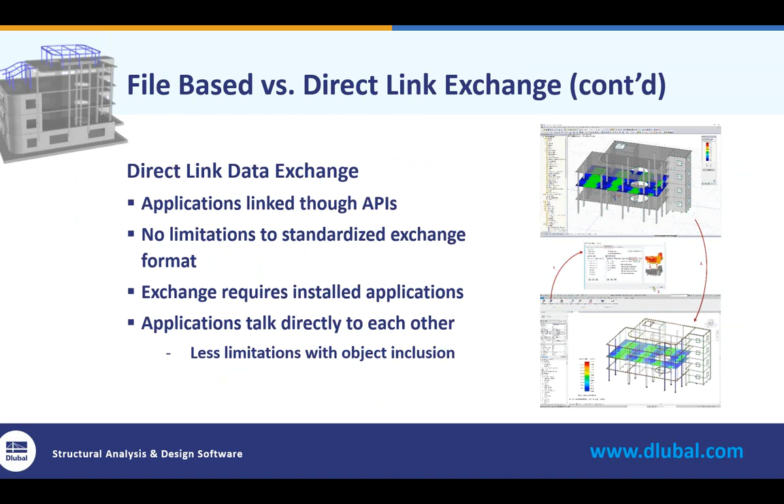With this option, the applications talk directly to each other. So with this, we're going to see a lot less limitations with object inclusion. So back to my previous example with nonlinear supports and load combinations, well, now we can just code in the option through the API interface to keep this information available. So whether we're round tripping between the programs, we'll never lose that information, even if it isn't necessarily included in the program that we're interfacing with.

So this leads us to the Dlubal Revit link and the import-export options available. So I want to first note that this does utilize direct integration with API. So again, we're going to see a lot less data loss than when we're creating a data file format. This option is included in RFEM.

So for those of you who are not familiar with our programs and how they work, we do operate with the add-on module system. So RFEM is our main program. This provides us with a full analysis. Our add-on modules are utilized for design, for example, or dynamics. Well, the import-export options with the Revit link are all included in the main program, and this is at no additional cost. The ability to integrate between the two programs is bidirectional. So we can update all or only part of the structure and continue to cycle between both programs continuously.

You can transfer the structure objects. So we can see here from our dialog box to import export in Revit directly the ability to turn on or off these objects. We also have the ability for the transfer of loads and load combinations. So in our next tab, the structural settings, again, you see the ability to turn on and off those load cases, load combinations, result combination options.

And lastly, with regards to result sharing, we have the ability to export the RFEM results to Revit. This includes both members and surfaces. So we're going to see the information available for deformations, internal forces for those members and those surfaces, and reinforcement, for example. Now, we've had the ability to transfer reinforcement of surfaces, so whether that's walls, elevated slabs, slab-on-grades for concrete design from RFEM to Revit for quite some time, but we also recently added reinforcement for members.

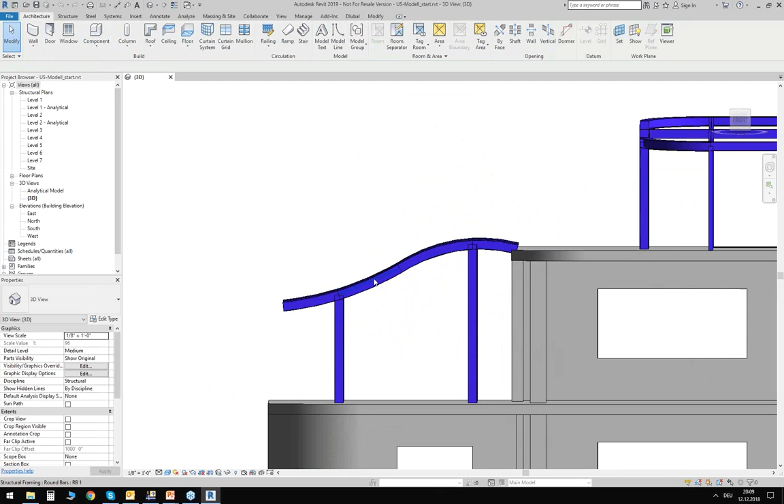Regarding the structure itself, I have here a mixed structure made of concrete and steel. I have a foundation slab. I have some walls with openings. I have curved walls, as you can see here in the corner. I have slabs with openings, concrete columns, and 2 steel constructions on top. The one on the left side has a curved roof shape, and the one on top has a sloped roof shape.

What you cannot see here right now in this Revit model, or what I did not include, is basically everything apart from the static relevant objects. So things for heating, cooling, ventilation, electrical systems, any kind of building services. You can have all those things inside the Revit model, of course. They're just not important when it's about showing the interface to RFEM. Important for the interface is the analytical model in Revit, and how you can get this analytical model I will show you now.

I think it's fair to say that what we have here is the physical model. It's the solid representation of the structural elements. So everything here is basically a solid: the foundation slab, the column is a solid, the slabs are solids.

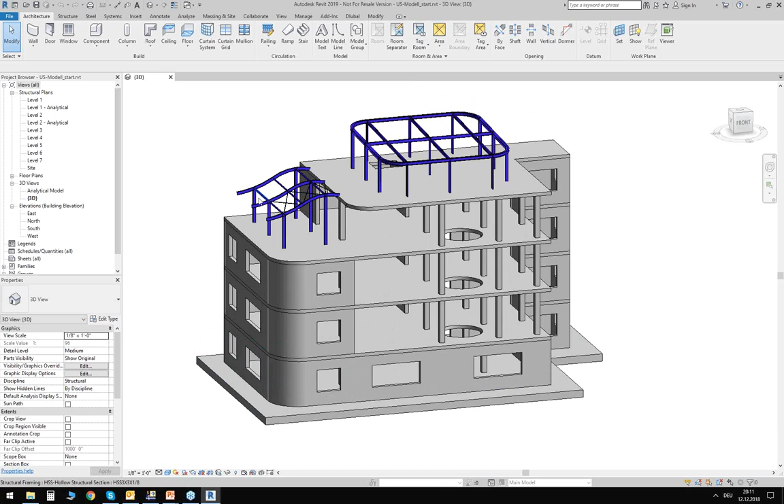But when it comes to the analytical model, we usually try to simplify things. So for example, the foundation slab we would usually simplify into a 2D surface, or the beams we usually consider as a 1D element. And this simplification can be done in Revit directly.

If you click on the structural element, you can access the properties here on the left side, and you can enable the analytical model. It has already been done here by me in advance. And if you do so, you will get an additional tab for the analytical foundation. Here you can now edit the properties of this analytical foundation.

So you can, for example, assign a surface support below, or you can deal with the analytical alignment of this 2D surface. Similar options you also have for walls and other structural elements, for example also for beams. Depending on the analytical object you select here, you may have different settings you have to deal with, or you can deal with.

So for example, we have here as well the analytical alignment of the member axis, but we also have an option to define member end releases in Revit. Additional to this, and this is now a little bit Dlubal specific, there are Dlubal parameters that I activated in advance. I have here an option to define this analytical member in the background as a member type truss. Or for my bracing here, I can define it as a member type tension. This is information which we can exchange with RFEM or with RSTAB, and I will explain it afterwards again.

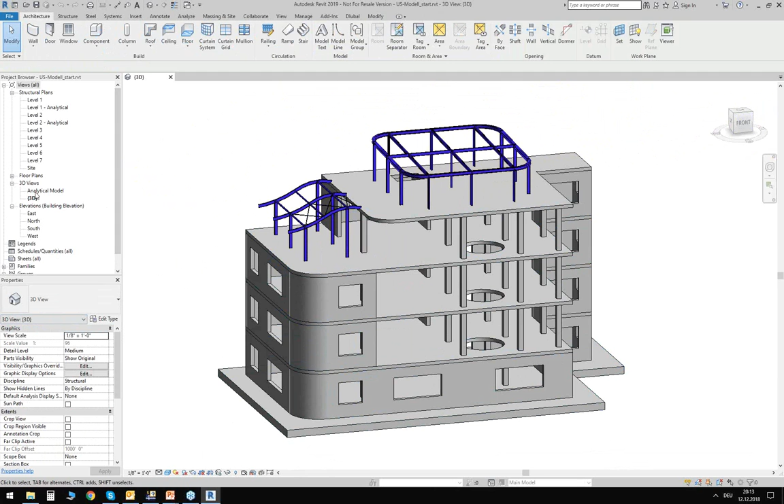Okay, so by activating the analytical model for each of those elements, you can create the global analytical model. And this you can, of course, also see in Revit. Revit has a predefined 3D view, which we can activate. So again, this is the analytical model. This is what we will export afterwards to RFEM. And you can see what I just mentioned: the foundation slab is now a 2D surface. Also, the members in general are now just a 1D element.

So in general, I think it's clear that when we export the analytical model, the geometry is quite clear. It's fixed, clearly defined by the length and the height of the elements. What's maybe not so clear is the exchange of information. And with information, I mean the exchange, for example, of the material names, of the cross-section names, and so on. I think in general, you can imagine that the material names in Revit may be different to the name of the material in RFEM. So how you write the name can be different.

Maybe I can show you one example here. I go to the Manage tab into my material library in Revit. And here you will find a material which is named Concrete Normal Weight 4 KSI. This is the material that I used for my concrete elements in the background. If we would export that name to RFEM, RFEM probably couldn't handle it. It doesn't know what kind of material that is, because the name of the equivalent material in RFEM is different. So we somehow have to link this information between those two programs. We have to define something like a conversion table.

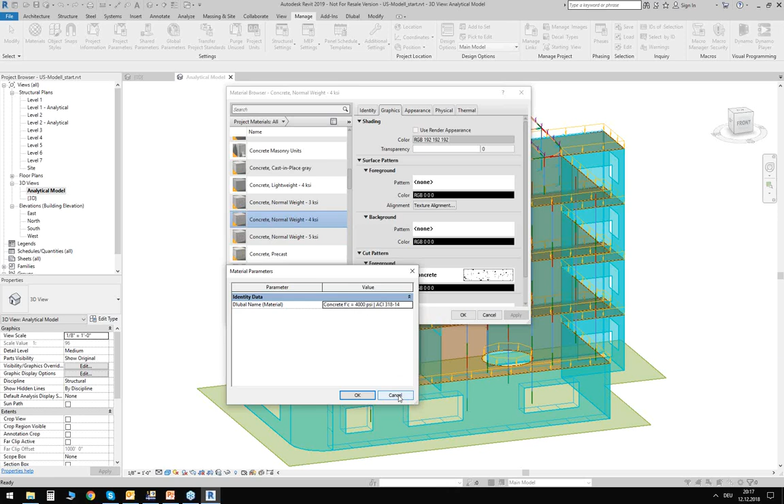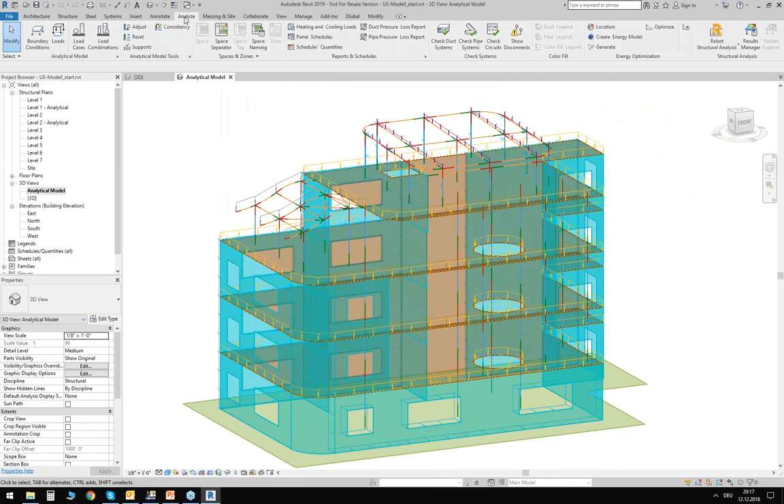Okay. Apart from that, we can also see some loads inside this analytical model. So we see here that there are some loads assigned to my members. Revit gives me the possibility to define load cases, load combinations, and even loads. You can access this information via the Analyze tab, and you can click here on the load cases, and you can see we have here 4 load cases for the dead loads, live loads, wind loads, and snow loads.

And all this information I can now export to RFEM. And I think this is something we could do right now. So how can I do it? First of all, I will show you my empty RFEM. There's nothing inside. And I can start the export from Revit. So I have here a Dlubal tab. And I have here options to export and import between RFEM, export and import to RSTAB.

And here I have some additional buttons. Here, for example, the one which we call Dlubal parameters. This is what I just explained. We have parameters for the materials, for the cross sections, for these special member types. Here you can activate these parameters in Revit, so you can access them here in these windows.

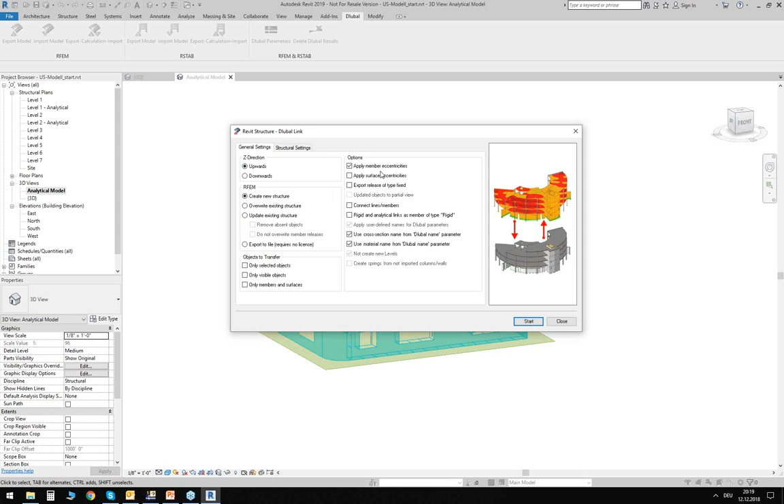So I want to export my model to RFEM. Therefore, I export this model. I can define some detailed settings for the export. I can define the Z direction of my RFEM model. It should go upwards. I want to create a new structure in RFEM. I want to apply some eccentricities that I have here inside my Revit model. And I also want to use these cross-section and material parameters that I just defined. Additional to that, I can also export my loads.

I can run the export. And you will see that it's quite quick. Yeah, the export is already done. So I can close this window. I can open RFEM again. And you can see directly that the structure we receive here on this end looks quite similar to the one in Revit.

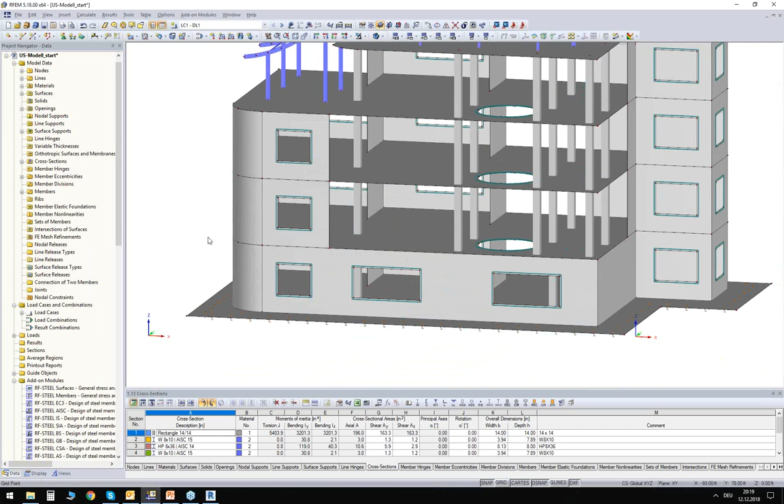We have the foundation slab as a 2D surface, of course, including some supports. We have our walls with the openings. We have this curved wall here in the corner. We have concrete columns. We have steel constructions here on top, the one on the left with the curved roof shape, the one on the top with the sloped roof shape. Yeah, looks quite good in general.

But if you exchange data, you always want to make sure that you exchanged the data correctly. So we should have a detailed look at this data. There are different ways how to do it, and the one way I would like to show you is by using the display navigator here on the left side. And here I have an option to render my objects according to different colors. So for example, I can render my structure according to my materials. We haven't seen any difference now because it's basically the default rendering option.

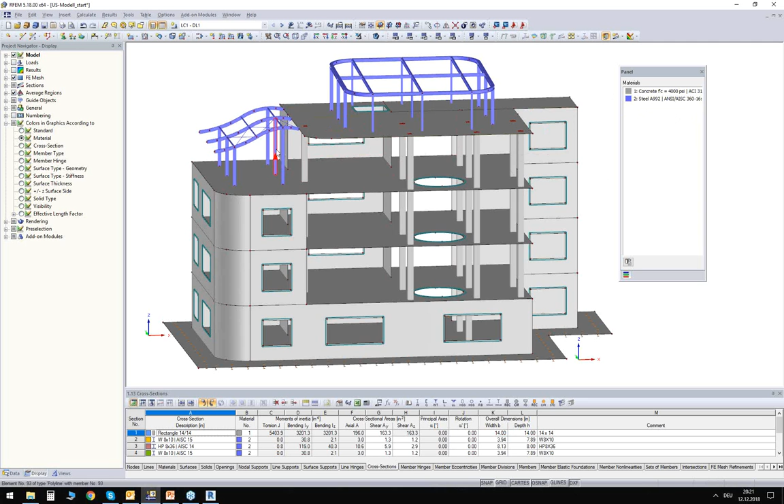What we can see here is that every gray element is made of concrete and every blue element is made of steel. We will see an effect if I change it to rendering according to cross sections. Yeah, thank you. We see here that the cross sections are now colored, and the color represents a specific cross section. So this allows us to get a nice overview of the structure and the exported sections from Revit.

We have further options here, for example, the member type. This is something I wanted to explain again. You can see here that we have different member types. We have member type beam, truss, and tension. And this is what I defined in Revit before. We said the coupling member should be a truss member. And we also said that this bracing should be a tension member.

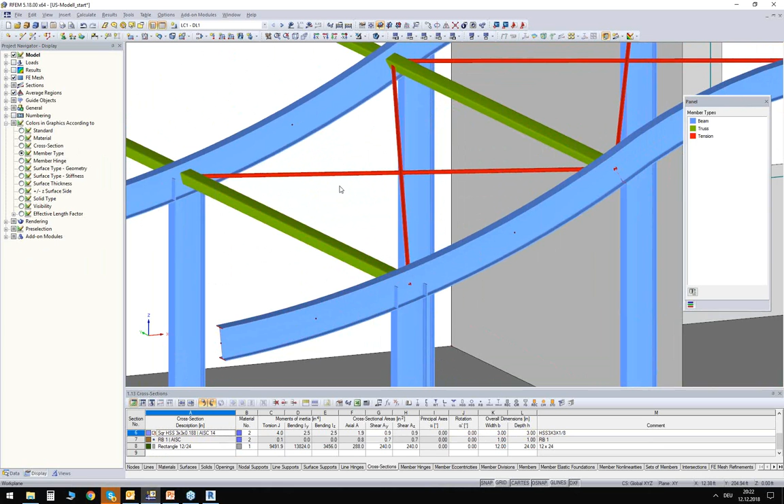And this is advanced information for RFEM. This basically means a truss member is a member with hinges at the beginning and the end, and a tension member is a truss member plus a nonlinearity assigned so that it fails under compression. So this is additional or advanced information that you can exchange between Revit and RFEM or Dlubal in general.

Okay, there are further options, for example, the rendering according to surface thicknesses and so on. And there's one which I also want to show you. It's according to member hinges. What you can see here is now that there's no color included in this graphic. That tells me that there is no hinge included. So I have no member hinges here in this structure.

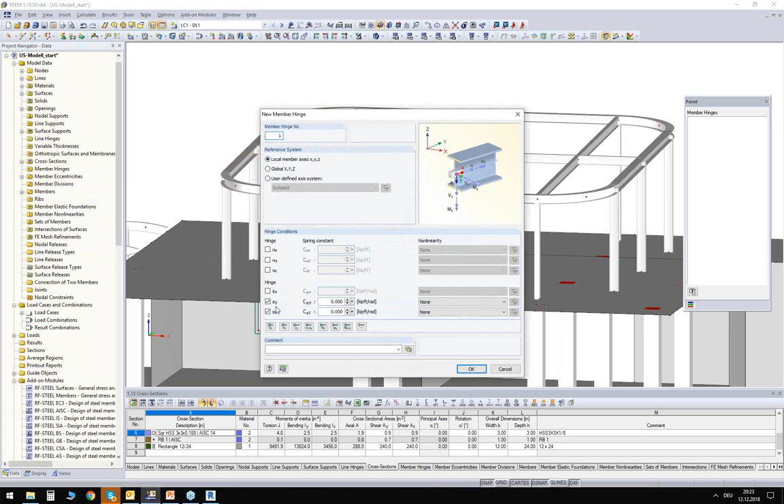What that means is that every connection here in the steel construction is a rigid connection. And as a structural engineer, this is something you want to avoid. And of course, we can add these member hinges here in RFEM as well. So what I'm going to do is the following. I will define one type of member hinge. In that type, I want to release the rotations around the Y and the Z axis.

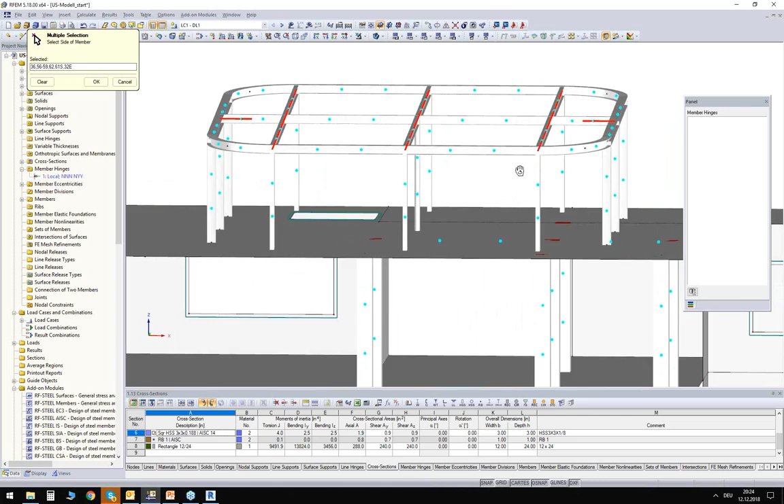And now I can assign this member hinge graphically to my RFEM model. Assign graphically to members. The only thing I have to do here right now is selecting these members. Depending if I select the end or the start or the center of the beam, I will apply this member hinge to the end, start, or on both sides. Okay, let me just double check if I did it correctly. Yeah.

I could even double check it by this graphic, which we have still activated. You can see now, I have one member hinge here, and the blue color will show me on which side of the beam I defined it. Okay. So with the display navigator, we can double check, for example, the imported data. We assume the model data is now correct. So I want to continue with my loads.

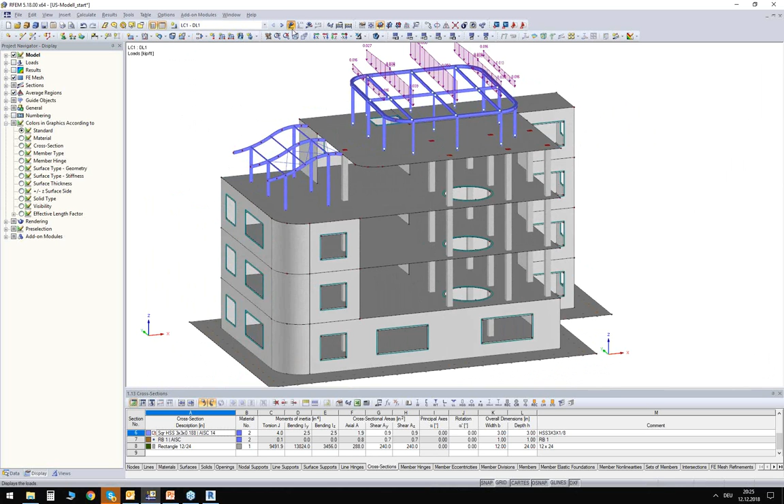I have here 4 load cases. These are the 4 load cases I expected to have because I exported them from Revit. And I can also take a detailed look. I have some dead loads, additional dead loads. In this load case, I have some live loads here on top of the slabs. I have some wind loads and also some snow loads.

I can see directly that the person who created the loads in Revit forgot the snow loads, for example, here on this steel construction. Again, this is something I can, of course, also add in RFEM. Therefore, I'm going to use a small generator. I will generate some loads from area loads on members via plane. So I'm defining the magnitude of these loads, 0.02 KSF. They should be related to the global projected area.

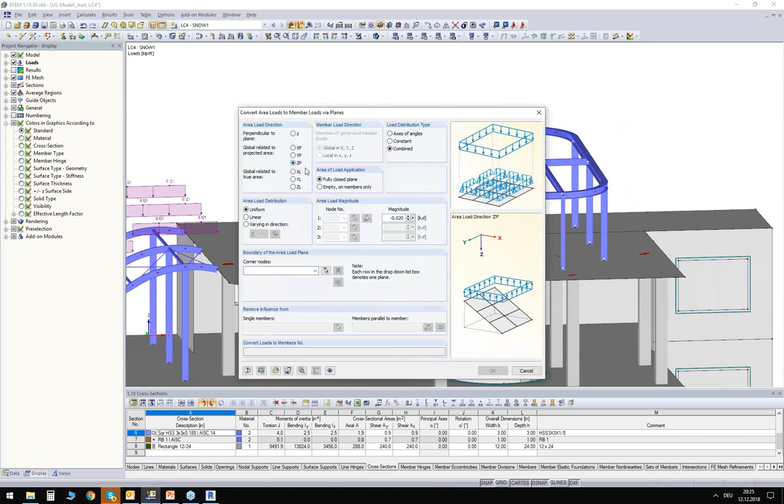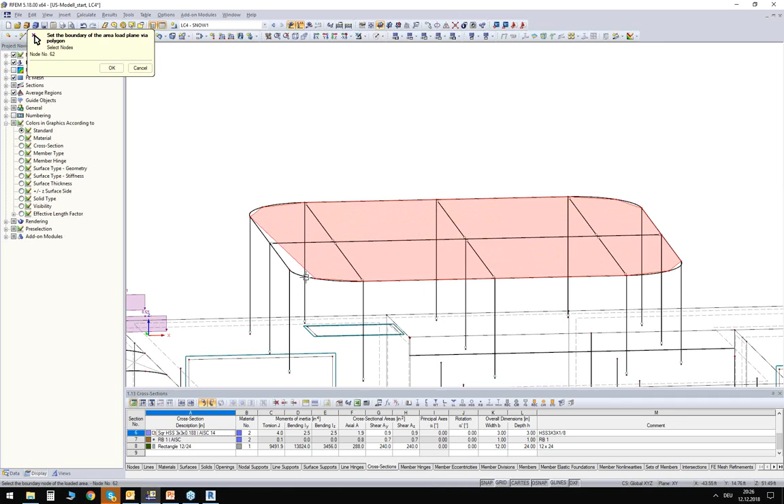And I can pick the corner nodes of my area where they should act. I will simplify it a little bit here for the presentation, just so we save a little bit of time. So I'm picking these corner nodes and I'm cutting a few edges, I know, but yeah, should be okay for now. I want to remove the influence from all horizontal members because I want the load to be applied only on the slope beams. Okay, so this is what I receive.

After I did that, I can see my area load. I can also change the display and display it separately as member loads. The intelligence of that generated load is still active, as you can see. So it's still a generated load. And this is an advantage for something I will show you afterwards. Okay. I don't want to deal with the loads any longer. For now, it should be okay.

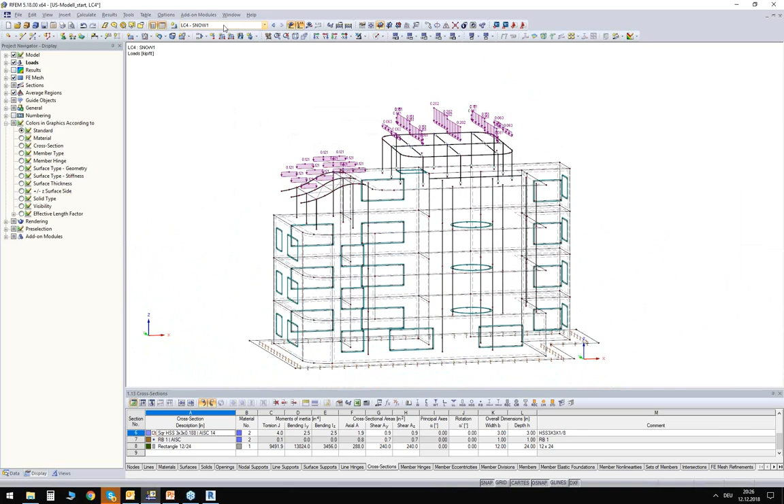So the next step would be the combination of these load cases. This is something I can do in RFEM as well. I go to my general data. I will enable the automatic combination of load cases according to the ASCE code, and create load combinations automatically. I want to control this automatic load combination a little bit. Therefore, I'm checking the related tables.

First of all, I want to make sure that the correct action category is used for every load case, which is the case here. In case we would have multiple load cases in the same action type, so in case we would have multiple wind load cases, for example, I could control here in that area that they should act simultaneously or alternatively or in groups or whatever.

Another important piece of information which we have to give to this automatic combination is according to which design situation it should create these combinations. So there is the LRFD section, the ASD section, extraordinary, structural integrity, and so on. And every design situation has its own rules for how you have to combine load cases, which you can see here. These are the rules according to the LRFD. These are the rules according to the ASD. You have different factors here and a different setup in general.

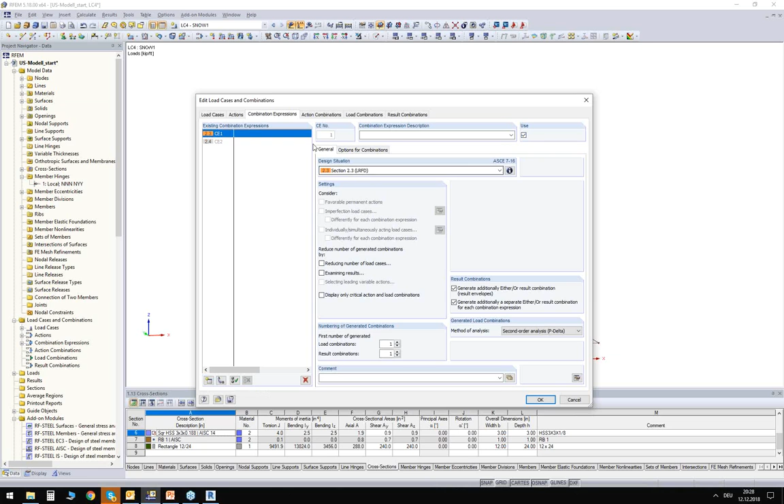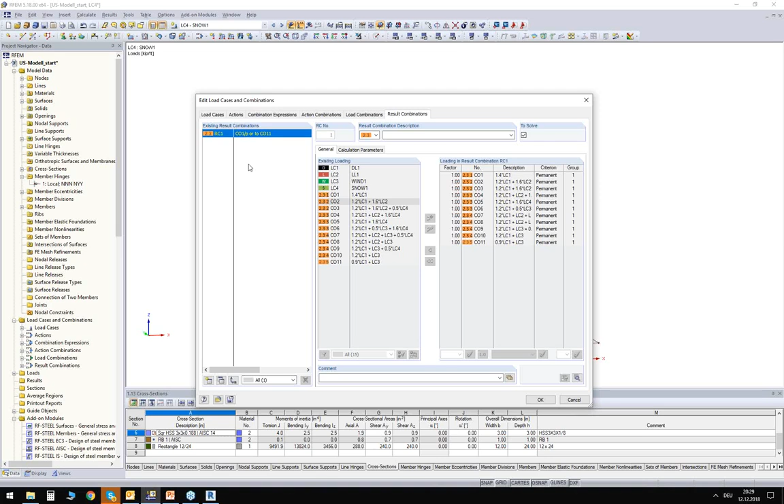I will create these combinations here. I can have a look at them again. I can see the factors, so I can control it or double check it. Additional to this, I get a result combination. A result combination is like an envelope for all load combinations. If you take a look at the results of a result combination, it will show you the maximum and the minimum and its related internal forces. Okay. You can switch between the load combinations via this drop-down menu.

So before we run the calculation, we should have at least a rough look at the finite element mesh. It's a finite element analysis here, so the finite element mesh has a huge effect. So what I will do is I go to my FE mesh settings and I will only define the target length of my finite elements. This is the most important information for now. I will regenerate the mesh and I can see the finite element mesh now.

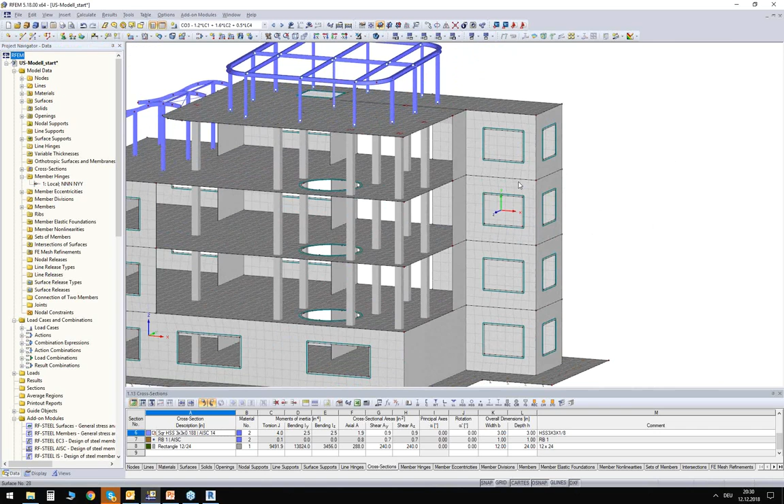In general, you could say it looks quite good. I mean, it's decent. There are some areas where it's maybe not so optimal. For example, here on the right side, where I have these openings, the windows inside, I have just two elements between the edge and the opening. This is not enough elements. So I want to optimize that area, let's say just this area here. How can I do this?

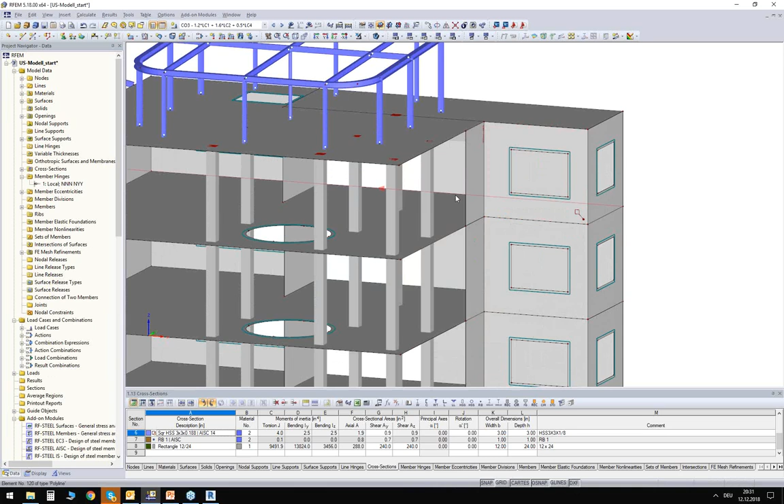I just double click on the surface. I can go to my FE mesh tab and activate a FE mesh refinement. The only info I have to give here is the target length of my finite elements in that area, maybe 0.5 foot. I accept and optimize that also on lines or on nodes. I will do it also for the node here. So around this node, I want to have an FE mesh refinement. I go to the tab, I activate the FE mesh refinement, and I can define additional information about the radius and the target length inside.

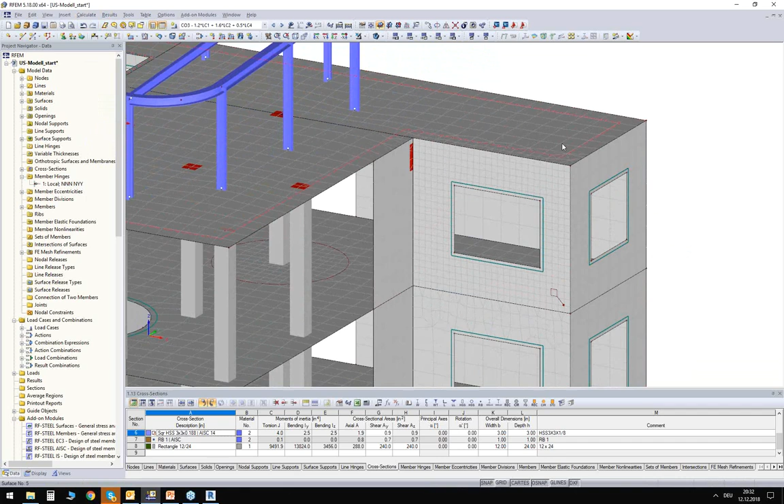Okay, we assume we optimized the FE mesh of the structure for every section. I will skip it here right now, and we regenerate the FE mesh. You can clearly see the effect now. So this is the global FE mesh. This is the refined FE mesh. You can see the effect as well here around the column. It was quite easy to change that.

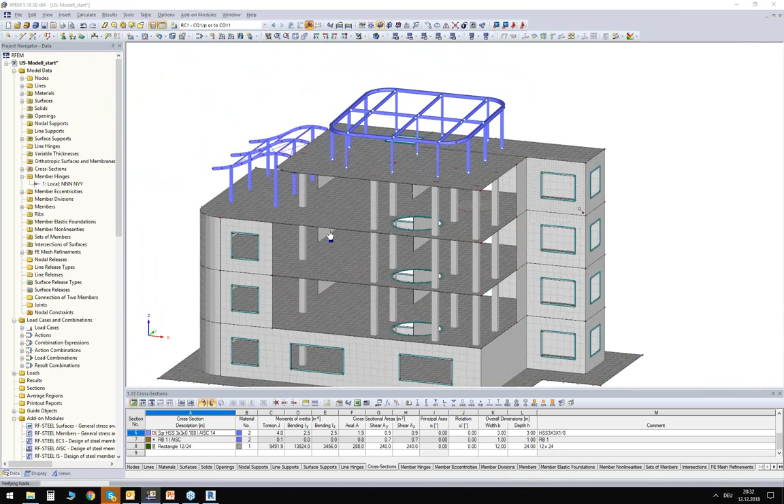Okay. So the next step is basically the calculation of the internal forces. I will do it by selecting my result combination here, and I will say, please show me the results of this result combination. I could have also done it in a different way. I could have clicked on the button calculate everything. But what does it mean? It will calculate also the results of my load cases. But I'm not really interested in the display of internal forces of my wind load case where there is no self-weight acting. So to save a little bit of time, I just clicked on the results of this result combination, and the program is intelligent enough to calculate only the required load combinations.

Okay, we will see the results in a few seconds. And then we can continue with the design of the structure. Okay. For some reason, it takes a little bit longer than when I prepared it, but that's okay. Okay, the calculation finished, we will see the results in a second.

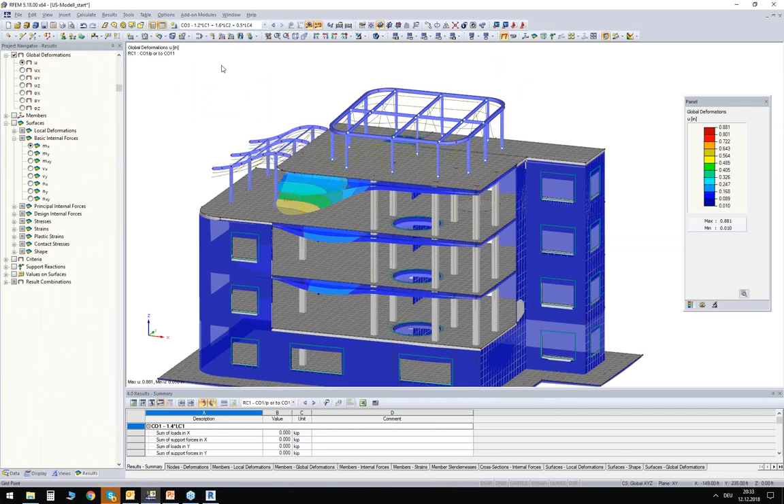And I can switch now again between my combinations and display for each combination my result. Let me decrease a little bit the display factor, otherwise it looks like the structure is failing. On the left side, I have my result navigator now. I can switch between deformations or member internal forces. So for example, you can see really nicely that the axial force in the columns will be increased every time it intersects with a slab, of course.

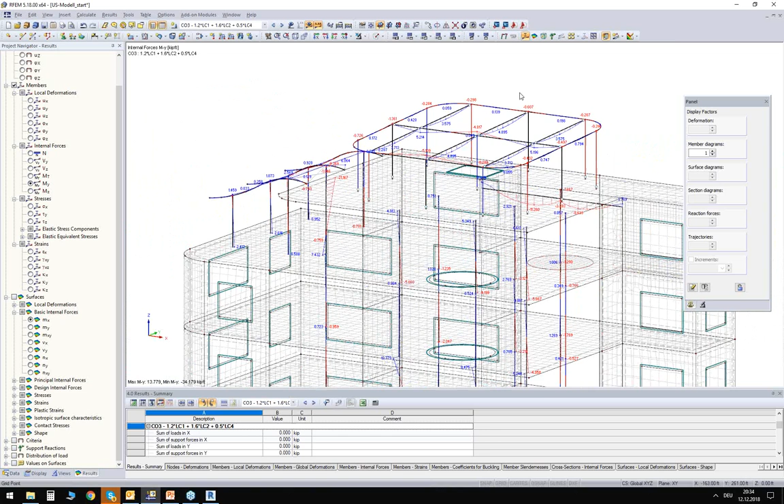I can also display some bending moments, maybe to double check if the hinges I defined work correctly. I can, of course, also take a look at the results in my surfaces, maybe some bending moments in my surfaces, or even the contact stresses on the foundation plate on the bottom.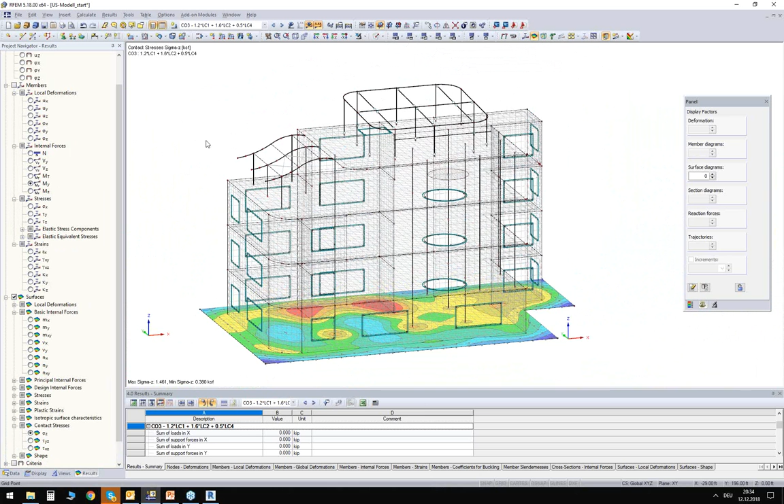With the calculation of these internal forces, we are not done; we have to design the structure. That means we have to do additional checks, stability checks, stress checks, and so on. And these additional checks can be done in additional modules or other modules.

And I want to go over this topic rather quickly because Amy has some really nice webinars where she explains every module in detail, or the most common modules in detail. So one module which I want to show is the module RF Steel AISC. It's for the design of steel members, and this is what I'm going to call up now.

You will notice that every module looks more or less familiar. So if you can handle one module, you most likely can also handle the other modules in general. So what I have to do is I have to select the members that I want to design. I only want to design here this beam and this column, for example. You can pick the code you want to design according to, and also the result combination.

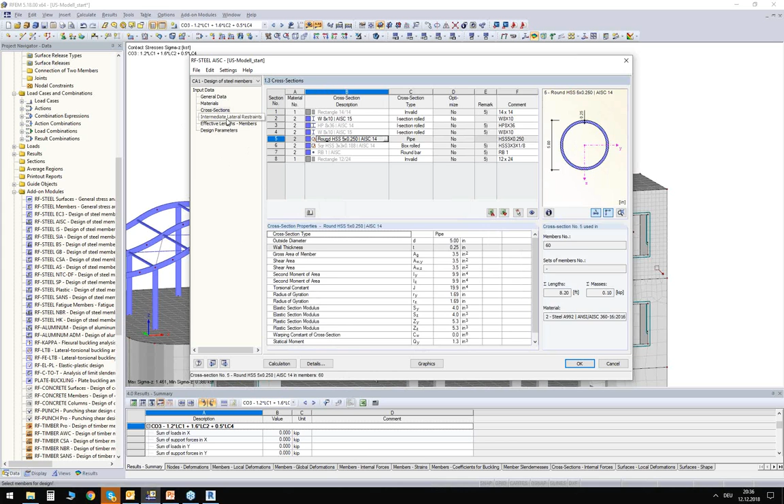You have now additional windows that you can go through. Some of them are just to give you an overview about certain properties for materials or cross sections. Other windows deal with the stability checks of the beams. So for example, you can define intermediate lateral restraints, you can define the buckling lengths, and so on, or the design parameters. I will leave those values on default.

So I will run the calculation and I switch into my result table design by cross section. So what I see here is for each cross section that I designed, the maximum checks. And I notice directly that the W section for the beam has a design ratio about 1.12. So it's higher than 1, which is not good. On the other hand, the design ratio of my column is not even at 10%. So I have to optimize both cross sections somehow.

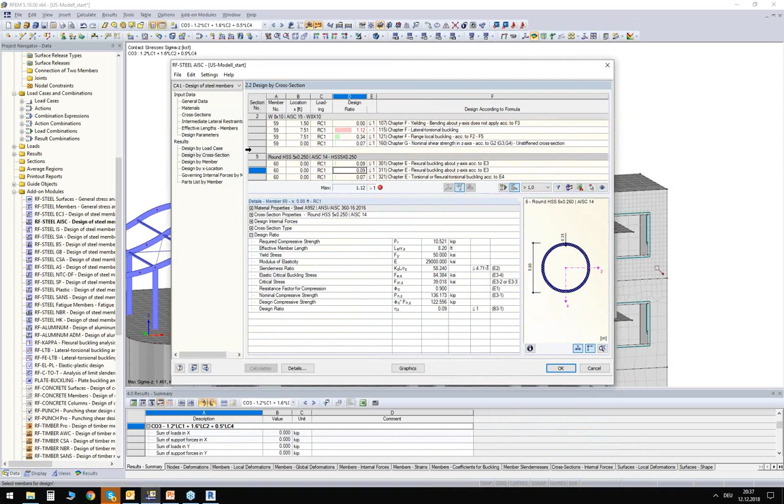And I can do it the following way. I can go to my cross section window again, and I could, for example, let the module optimize the pipe section automatically from the current row. Current row basically means the following. It will look for the best section in this list here. And with the best section, I mean the section where the design ratio is smaller than 1. And the criteria for this optimization is actually the self-weight of this section.

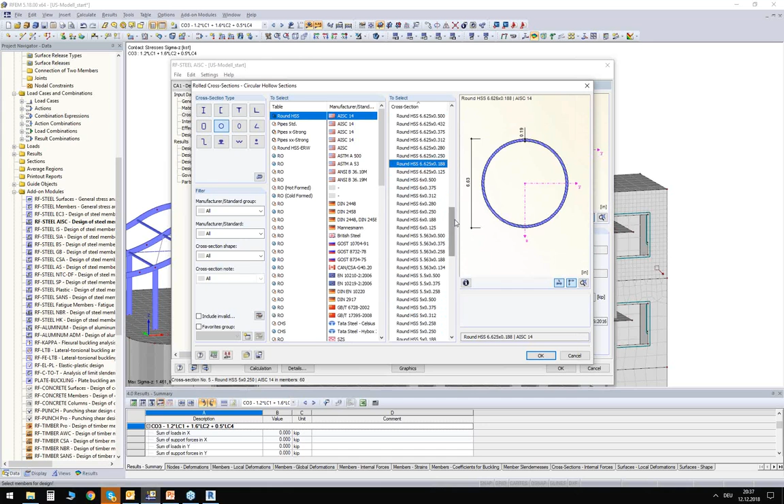Okay, wait, I did a small mistake, sorry. Import cross-section from RFEM. I changed it, which I didn't want to. I want to optimize the cross-section, and I could, in general, do the same for the W section, but due to constructive reasons, I'm not able to change the section.

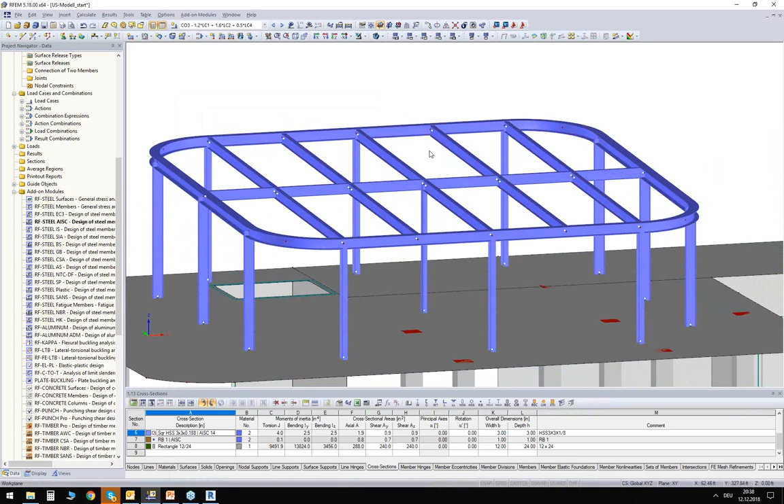So what I'm going to do here is I'm going to apply additional beams in my roof. So I just select the beams, and I use drag and drop to copy them. It's like a graphical tool to copy beams, and it's really quick and easy. And by defining additional beams, I will spread the load. And this is something that I want to show.

If you remember, we defined here this generated load where we defined the area where it should act on and so on. And this load is so intelligent that it recognizes these new members, and it will redistribute the area load to all beams now, to all slope beams. And this basically means that the load on the beam we design will be reduced.

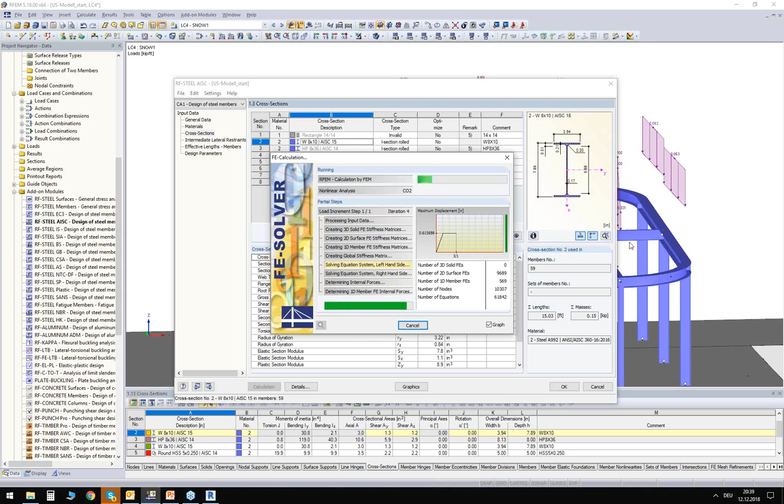So I go back to my module, and I rerun now the design. So for the pipe section, I'm using an automatic optimization, and for this section, I optimize the analytical structure in the background. I click on calculate again. And yeah, of course, I have to recalculate now the internal forces simply because I changed the analytical model in the background. I added additional beams, I redistributed my loads, so I have to rerun the analysis.

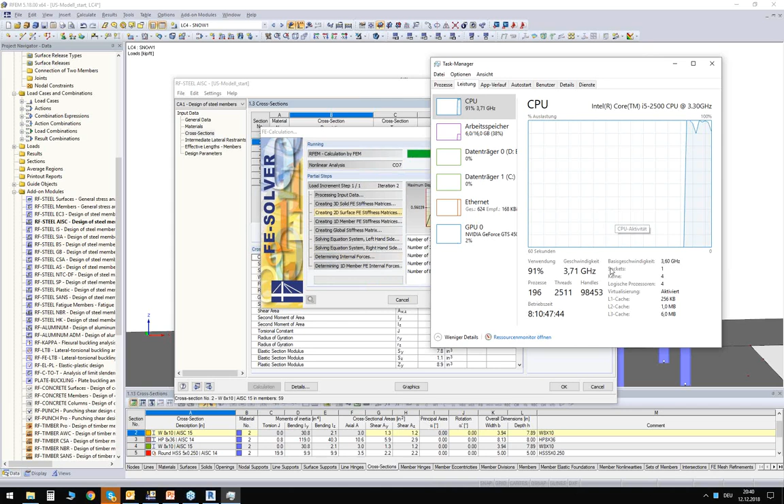Maybe one side information while we are recalculating this. Maybe something I can show you, the task manager. And in the task manager, you can see that I'm using more or less 100% of my CPU. That means we are able to use all the physical cores from the processor or from the CPU. So in case you have good hardware, it will definitely benefit the performance during the design or during the calculation here. Okay, yeah, we have to wait a few seconds more and then I'm done with the design.

Okay, this should be the last one. We will see our result tables again. And in these result tables, we will see now that the design ratio of the W section is at 66%, which is fine. And the design ratio of my pipe section is at 94%, which is also fine.

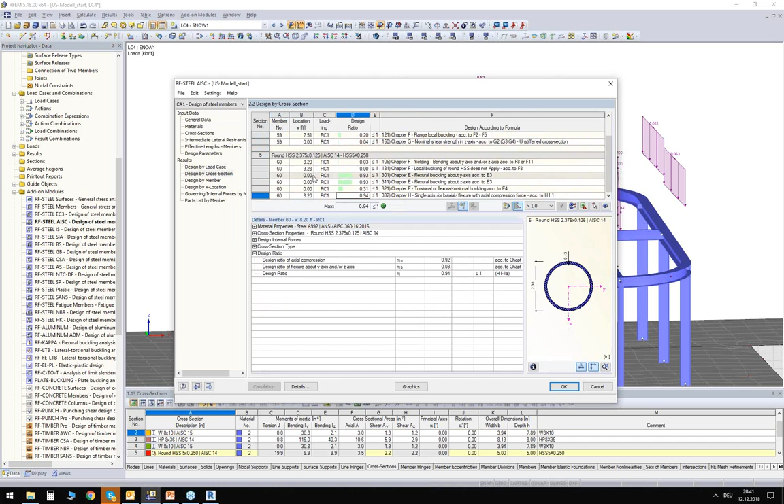So to make it 100% perfect, we would actually have to redesign everything because the design of this optimized pipe section has been done with the internal forces of my original structure. So what I would have to do is export this optimized cross section back to RFEM, recalculate my internal forces, and with these probably slightly different internal forces, I can rerun the design. I will skip this check right now, or this loop.

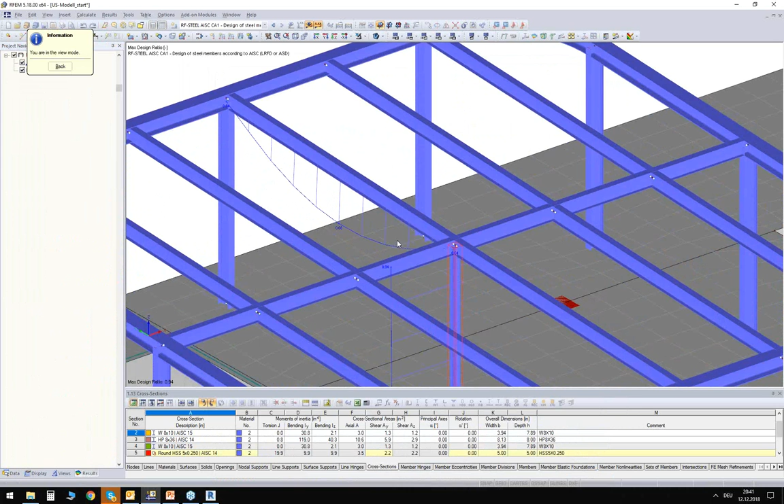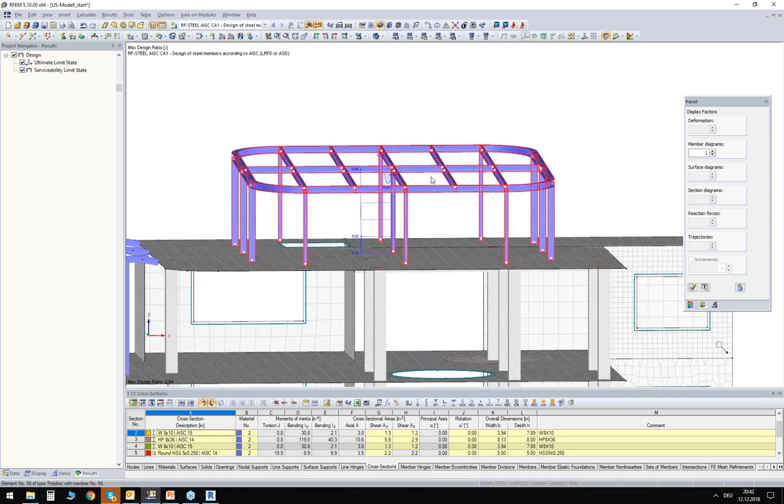Of course, we are able to display the design ratios also graphically. I think this is no big question. Okay, so we just changed a lot of stuff in that top steel construction here. We added hinges, we changed the amount of beams, and this is maybe something which you would like to give back to the Revit model. So you want to update the Revit model with this information. And the way you can do it is following.

You go back to Revit and you run the import from RFEM. You update the existing structure. I don't want to consider any eccentricities right now. I want to apply loads, that is okay. And I don't want to import any results right now. Just update the physical model. So I can start the import and you can have a look at this area here.

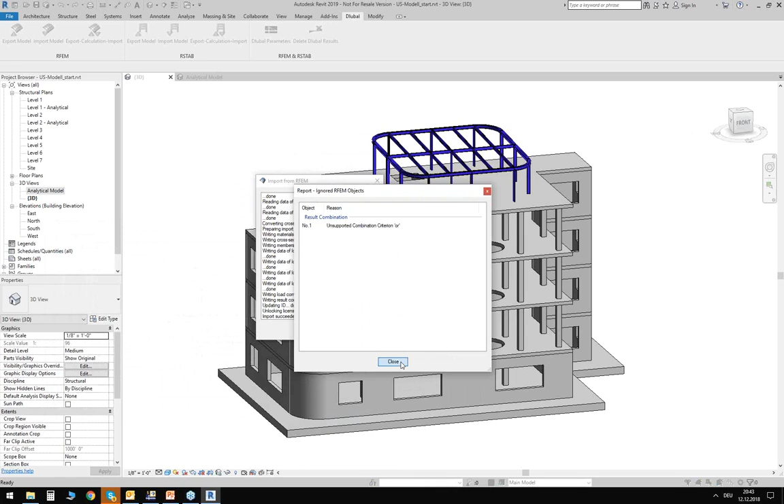Okay, so first of all, we get a message about an unsupported combination criterion. Basically, Revit tells me here that it cannot handle result combinations. It's not a big deal here. Important is that we have now these additional beams in the roof. And we also have updated information in the analytical model.

So you can see here in the properties that we have now also information about the hinges on the bottom of this column and also in the beams and everything. So we were able to update the analytical model in Revit, and we were also able to update the physical model. We added new beams here.

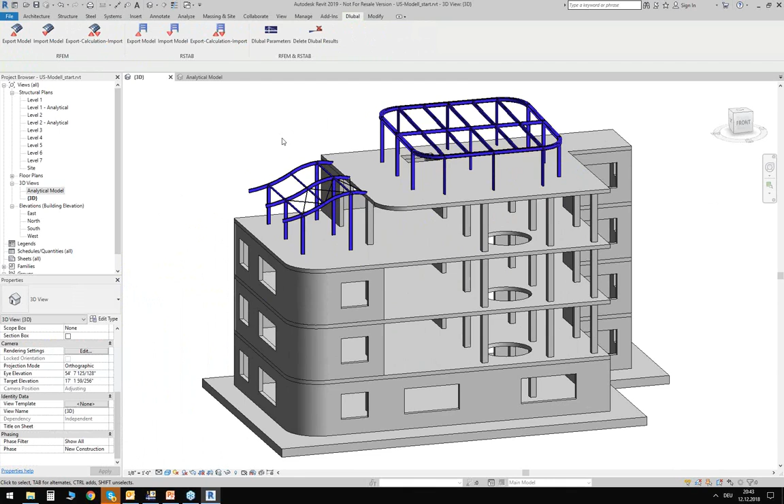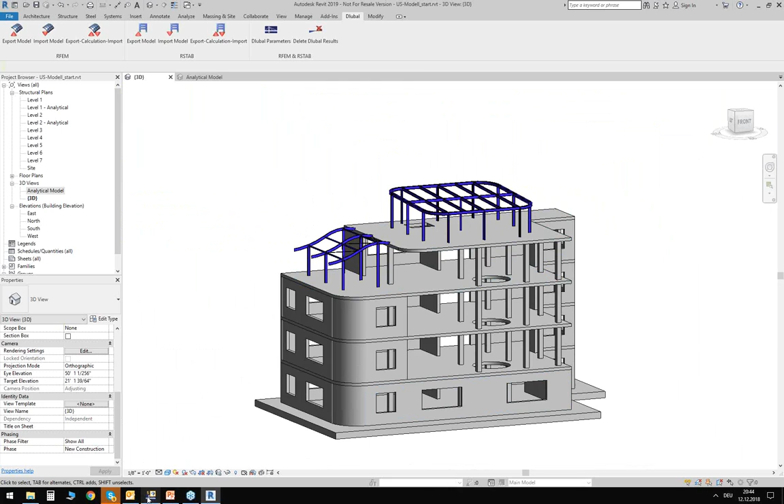Okay. The next thing that I want to show you is also the design of some concrete elements. I want to design the columns, and also there's a beam inside, which I didn't show you before. I want to design these elements in RFEM and also export this result into Revit. So I go back to RFEM, and to design these concrete elements, I need a different module. This module is called RF-CONCRETE Members.

And it looks familiar. You simply have to choose the code you want to design the concrete members according to, and the load combination again, or the result combination in this case. And then you have again additional windows for the material, for the cross section, reinforcement layout windows, so which possible rebar you want to use, stirrups, the concrete cover, and so on. Again, Amy has some nice webinars about this module, which you can take a look at.

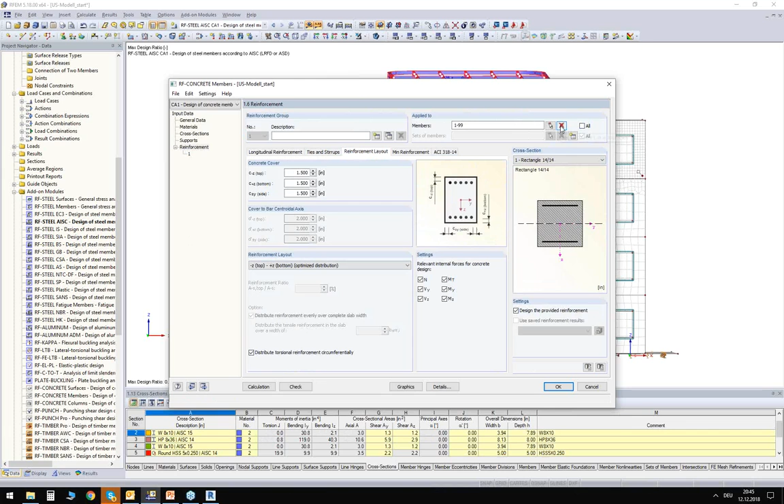The only thing which I want to change here is the members I want to design. So I'm selecting here all the columns from the highest concrete level and also the beams here in the background. Okay, I will run the calculation. Since I already have the results from my result combination, I only have to do the design of the beams, and it's quite quick.

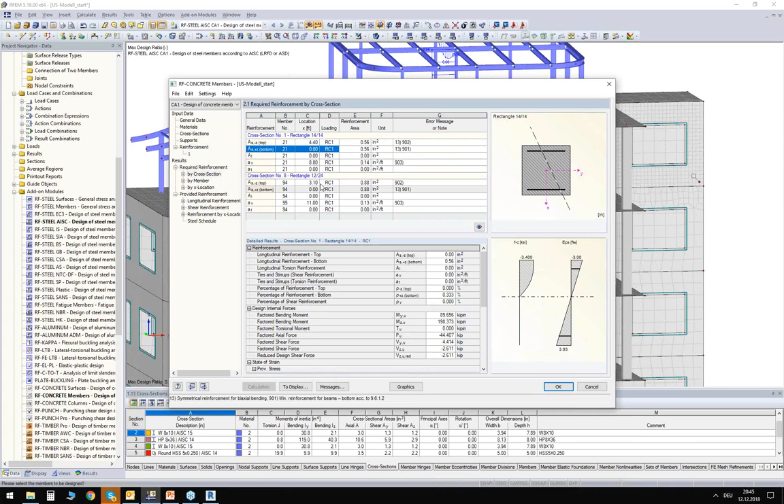So I get now additional tables for my results. I have here information about the required reinforcements on the top and bottom layer of the section, for the shear, and so on. And this module also gives me a provided reinforcement. So here I have some nice drawings, and I can also display this provided reinforcement in my RFEM structure.

So I can choose here the concrete case, display the results, and enable the reinforcements rendering. So I will zoom in a little bit, and you can see I display here now the rebars inside my concrete column. And this is also working for beams, of course. Here you can see the stirrups and the longitudinal rebars in the beam, including the hooks.

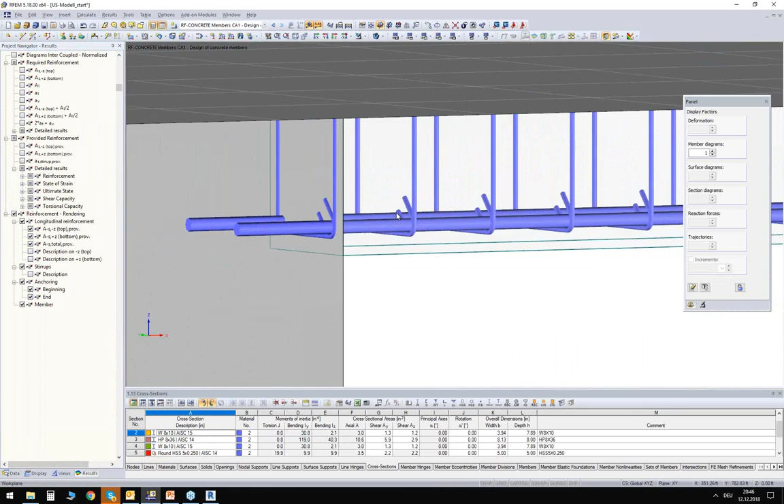And this is also information you can export. This is a quite new feature. So I can go back to Revit.

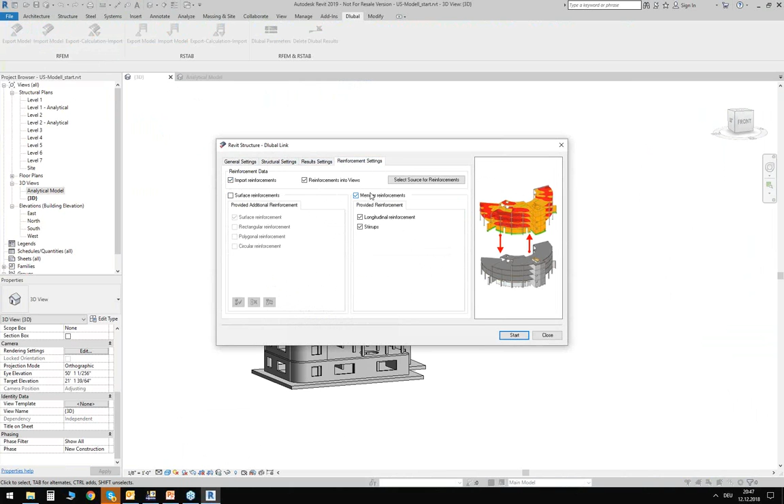I can import the model or import the results from RFEM. I will take a look at the settings here right now. So I'm not interested in results, I'm interested in reinforcement settings. I want to import the reinforcement not from surfaces but from members, because I designed members here. And I can run the import.

So this is again the log basically, which will show us. And after the import, we do get, okay, the same message again. I don't care here in that moment. But we also get a new 3D view, and this is called 3D reinforcements. And by default, the reinforcements will be displayed as wireframe model.

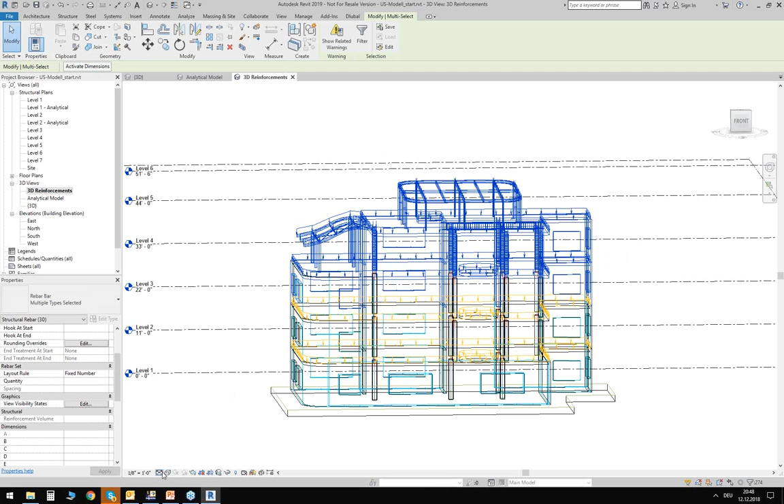If you switch up a few visibility settings in Revit, so for example, you have to change the visibility for the rebars in that specific view as unobscured object and view as solid. And then you can also change a little bit the display of the structure. You will see the rebars also in a nice solid model here in Revit. So you can see again the stirrups, you can see the longitudinal rebars in the columns, and also in your beam.

And these are not simply graphical objects. This is actually a rebar. So if you click on this object, on the stirrups for the column, for example, you could change now the shape of the stirrup. You can change the hooks. You can change the quantity of stirrups in that column, and so on. So it's an actual object you can work with.

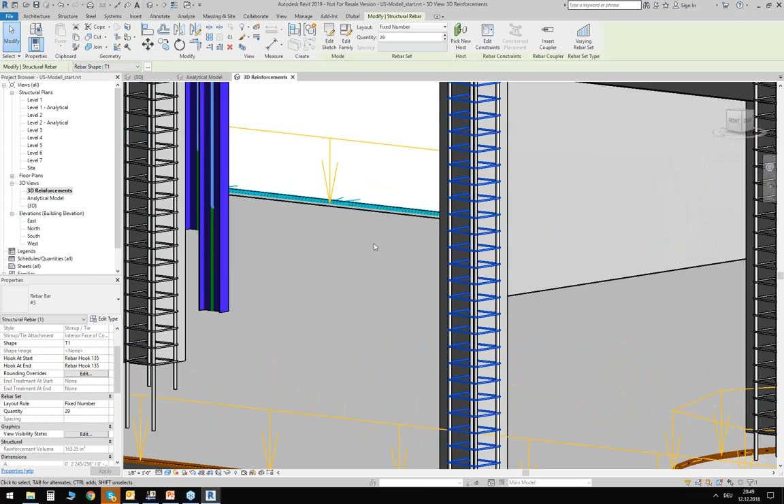Okay. This would be the first scenario that I wanted to show you. So the exchange between RFEM and Revit using the global model, so the complete analytical model. And you could theoretically continue here. You could change or update or add additional things in Revit. You can update the RFEM model. You can design again the RFEM model and export these newly found results or anything else back to Revit. So back and forth, and this is what Amy said, it's a bidirectional interface.

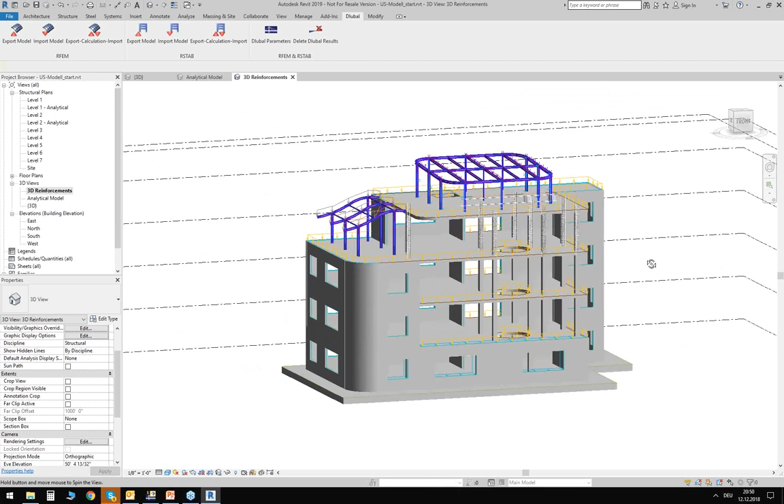But not in every situation you want to export the complete analytical model. It's not always required, and not every engineer actually wants to work with big 3D models. Some prefer to work with smaller models, or they want to design it level by level, for example. And this is something I would also like to show you. You can export partial models from Revit to RFEM. And I did it in advance for this small structure here on top, for the steel structure. I can show you.

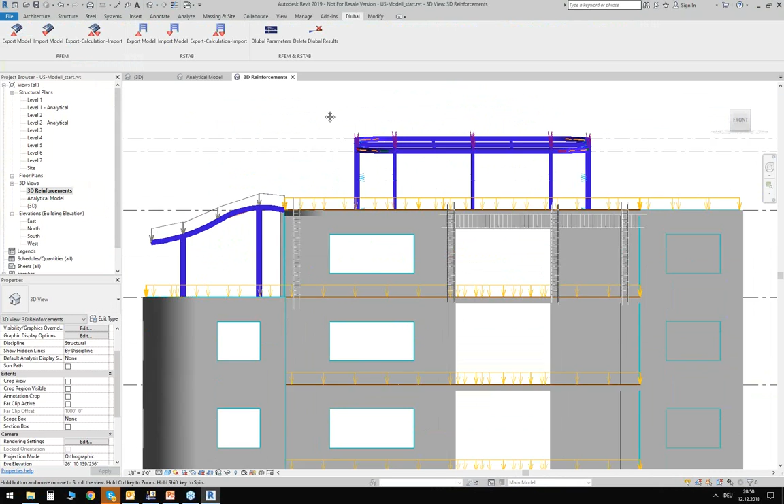So I have here this pavilion. It came from Revit, and I calculated and designed it, and I have some support forces down here. And now I want to do it for the concrete structure below. So I would like to do it basically for the following elements: for the concrete walls, for the concrete slab, and the concrete columns in that level. So I select those objects here in Revit. I go back to my Dlubal tab and I say export model.

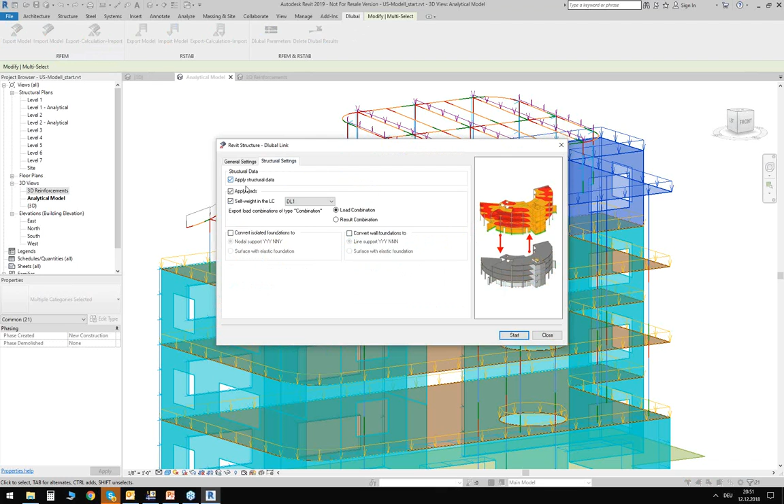I can create a new structure in RFEM, and I export only the selected objects. You can also do it via visibilities. I prefer here selected objects. I want to apply my member eccentricities, use my Dlubal parameters again, and also apply the loads. So I run the export. It's done. I can go back to RFEM.

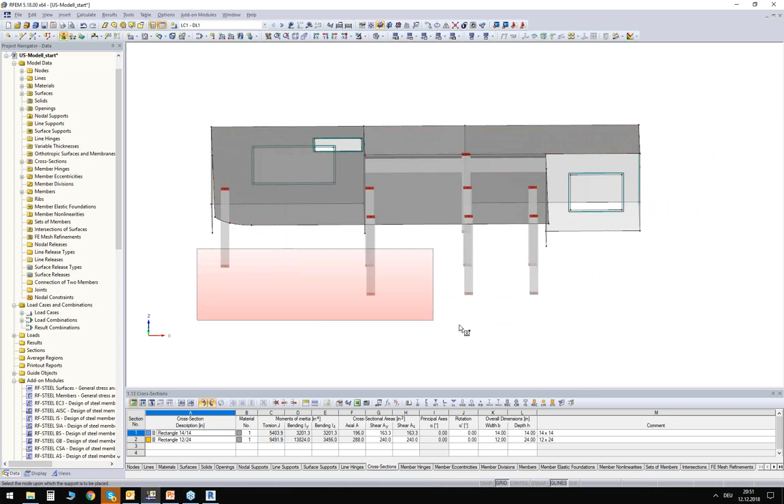You can see here this partial model from Revit. So just the concrete elements from the top floor. And you can work with this, of course. You can support the columns with nodal supports. You can assign line supports onto the walls. And we also imported the load cases from Revit. So we have here the live loads on top of the slab. We have some wind loads and so on.

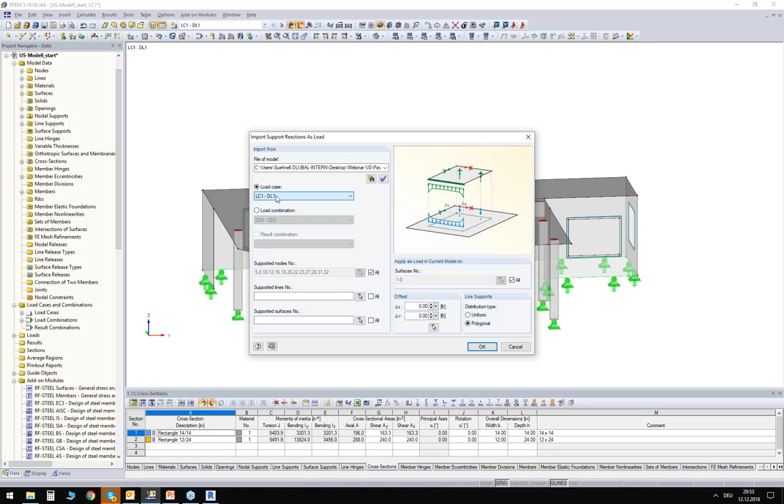But we do miss now the loads from the structure which we have on top, you know, the pavilion, the support forces. But there is a nice tool in RFEM, and you can call it up via the tools menu, and you can import support reactions as loads. So I will click on this option. I can choose here the file, the pavilion that I designed before. I can say, please import the support reactions from all supported nodes from any load case that I calculated in there, for example, load case 1, and please place these loads on top of my slab.

Okay. You can see here now that we imported the support reactions from every column from the structure on top. And maybe you want to double check the values. We have here 2.1 kip. And if I go back to my pavilion, I can see here, this is the support reaction from my dead load case. And with this workflow, you can actually import the support reactions from every load case from the structure on top.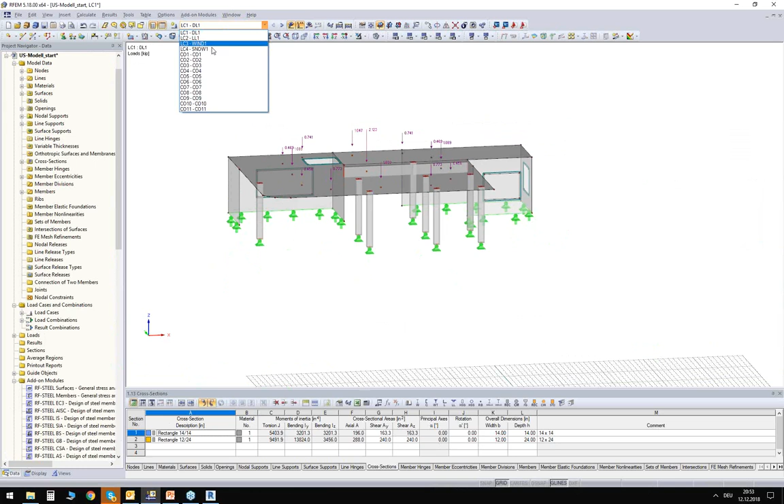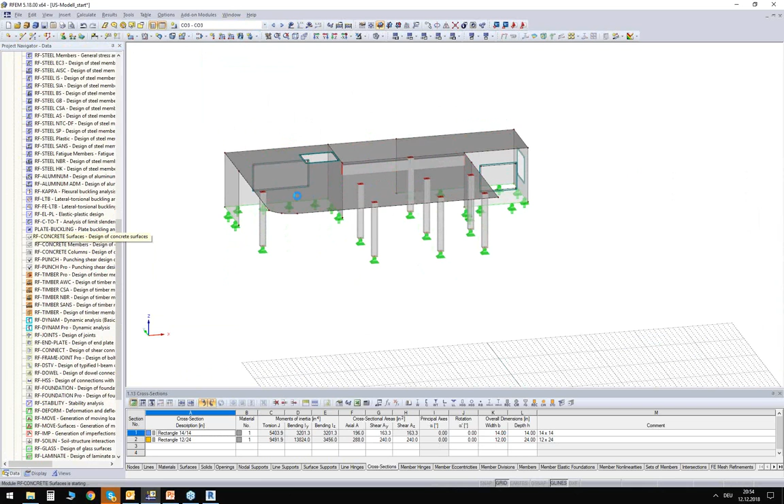And since we imported also the load combinations already, we can use it and redesign the structure. Maybe I can show that quickly. For the slab here, I can call up the module which is called RF-CONCRETE Surfaces, to design concrete surfaces such as the slab or the wall. Again, it looks familiar more or less.

I will use here just the combination 3 now, according to the ACI standard. I will tell this module, please design me now only this concrete surface here, the concrete slab, and calculate the required reinforcements for this. This is what it will do now. I get now result tables with required reinforcement information, and I can display this also graphically, of course.

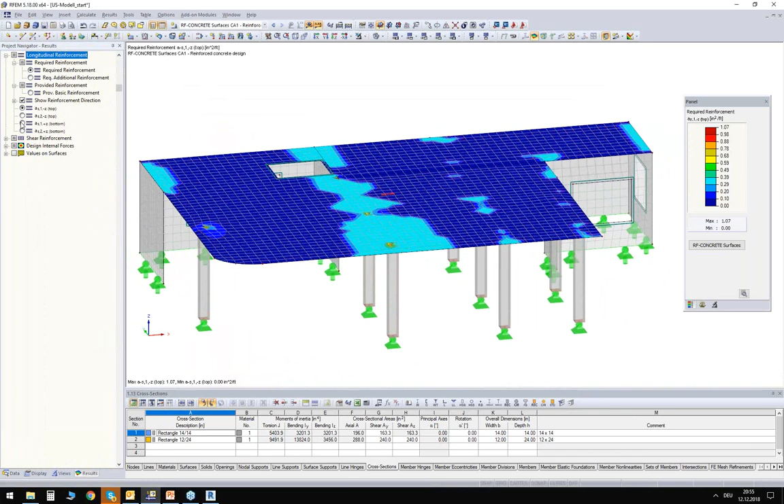So in my result navigator, I can display now the reinforcements on top, which is now higher in the area of my columns, or the reinforcements on the bottom, which is of course higher between my supported nodes. And these results I can also export back into my Revit model. So what I can do now is I can go back to Revit. I can import results.

Let me just check a few settings here. So I want to import now result values from my concrete case. No reinforcements, because we didn't calculate any reinforcements there. We calculated required reinforcement values. So I import these values. I can click here on results from surfaces. Maybe all these results I want to import from the required reinforcement, and I can choose the source I want to import it from, which is this concrete case I just defined. Okay. I run the import.

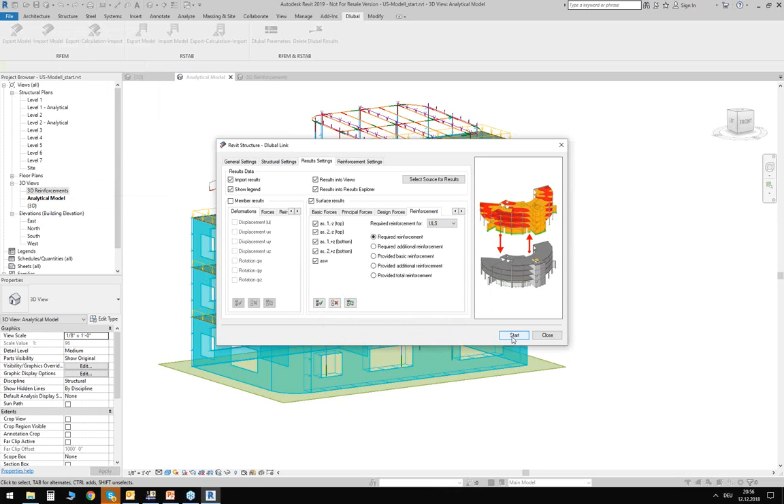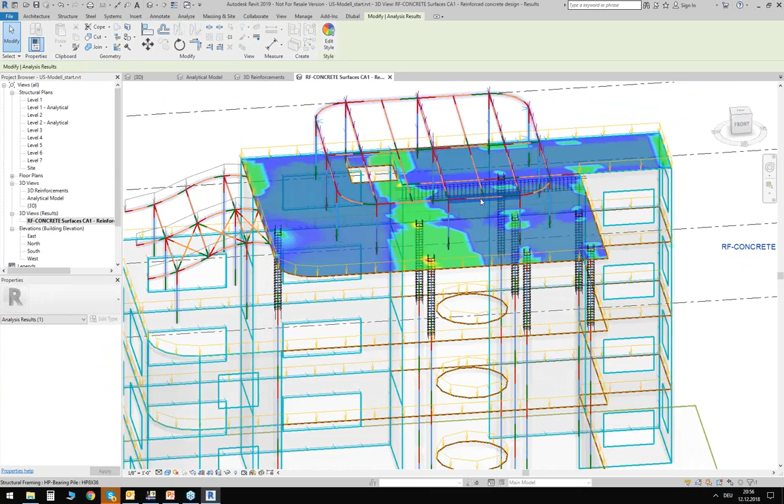And what I will get afterwards is a new 3D view here on the left-hand side. And as you can see, I imported now the values into my model, including this navigator here on the right, this color scheme on the right. I can even switch between my results, because this is now just the reinforcements on top in the slab. But via a result explorer, I can switch between my results in that view.

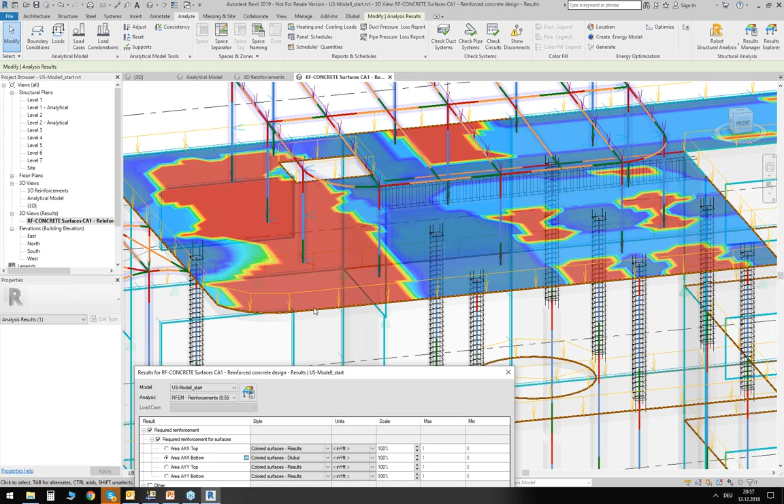So I can say, please display me also the reinforcement in the bottom of my surface. If I click on apply, this view will update, and I can see the bottom reinforcements in my slab. So this is something that we just saw in RFEM before, right? So we can not only import here the rebars, we can also import result values from concrete modules, from internal forces, and so on.

Okay, so this was the second scenario that I wanted to show you, that you can work with partial models. You can extract partial models and also update again the global model in Revit. And the last scenario, which is even shorter to explain, is following. I will close every model that I have here in Revit. So there's no model open. I will also close a few models which I have here. So this one and the pavilion as well. So it should only remain this global model that I imported before.

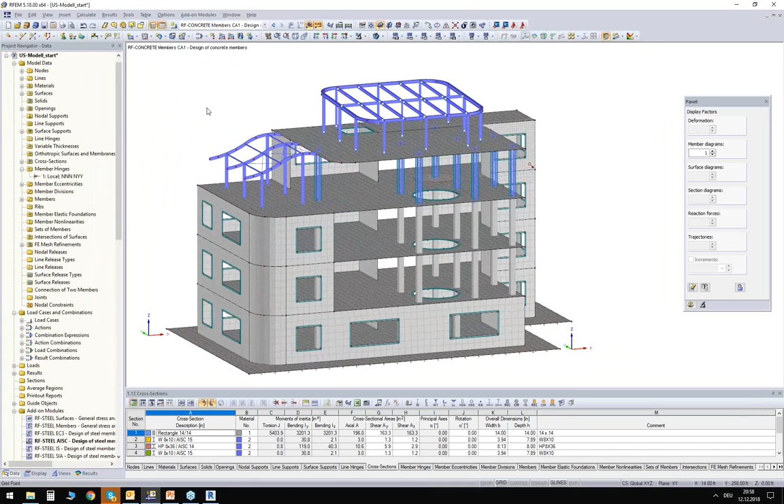And I can do also following. Imagine there's a structural engineer who designed this mixed structure here, and there's an architect who has to create some drawings in Revit, and he's now asking for any information the structural engineer can give him about the structure. And the big benefit of this interface is that you can also export the analytical model in RFEM to Revit. So you can do it the following way.

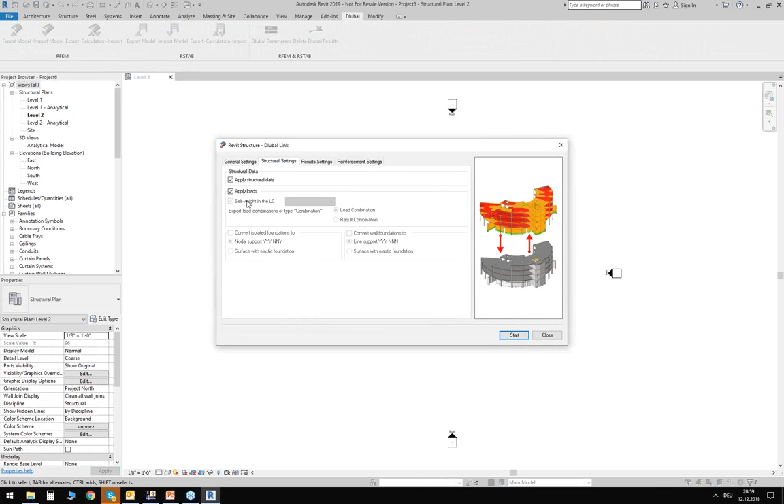You create a new model in Revit. You pick any template you have here, and you can go to the Dlubal tab, and you do more or less what we just did before. We import the model from RFEM, and we apply member eccentricities. I skipped the loads. We could also import the loads, but I'm not doing it right now here. Try to keep it simple, and I can run the import.

And then the following could happen. It could be that Revit is asking you if you could assign a Revit type for this type of section here. So there's a column in RFEM, a round hollow core column, a pipe section, where Revit doesn't know how to deal with it. Now you could think we defined these conversion tables, and there is actually the information inside. The Dlubal cross-section round, HSS, and so on, should be the following section in Revit.

But this message here is actually a completely different issue. The issue here is that the template that I used has no information about the family for this section. So Revit is a family-based software. You have to create families for sections and for any element that you want to model. And if this family is not loaded in this project, then we cannot link between these two elements, between RFEM and Revit.

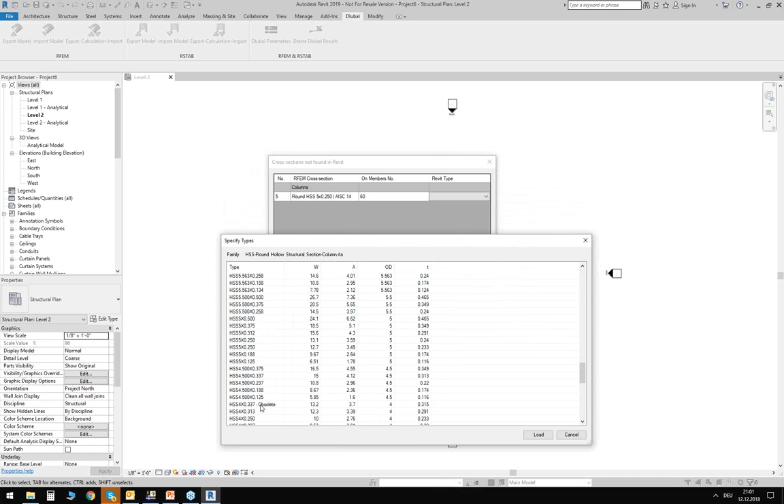So what you would have to do in this case, you would have to load this cross-section from the Revit library. And you can do this the following way. You click here on that arrow, you go to load family types. Then you can download some libraries from Revit, from Autodesk directly. For example, the US Imperial libraries for structural columns made of steel. And here you will find this pipe section that we are looking for. 5 times 0.250. Wait, I'm too high. This section here, I can load it, and then I can apply this section.

The import is running now. Okay, import succeeded. I can close this window, and I can take a look at my 3D view in Revit. Maybe change the visibility mode here into the shaded mode. And you can see we were able to import a structure which looks quite good. We have here the sloped roof, we have the openings here everywhere, and so on. So we were able to import a physical model from the analytical model in RFEM. Of course, we were also able to import the analytical model as well.

But the big benefit is that we get the physical model in Revit. And this is now something the architect can work on. He can adapt it. He can maybe even export it into different formats to exchange it again via IFC, via STEP, whatsoever. So it's really a big benefit, this third scenario, that you can create models in Revit from the data in RFEM. So this was the content that I wanted to show you. I hope I was able to show you some new or interesting features.